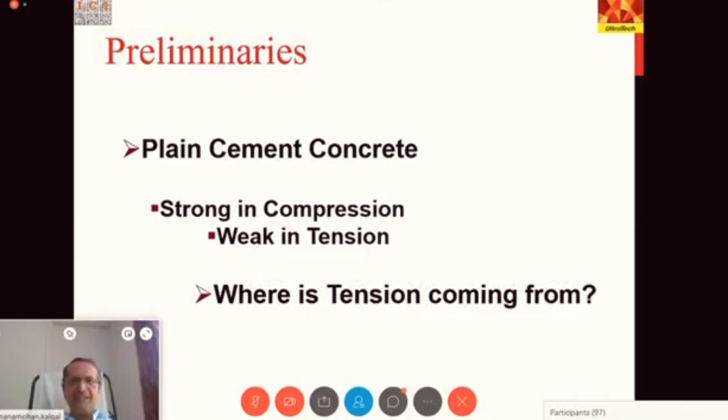But I'll start from the initial preliminaries. We know that plain cement concrete is very strong in compression but weak in tension. But why are we talking about this tension? Where is this tension coming from?

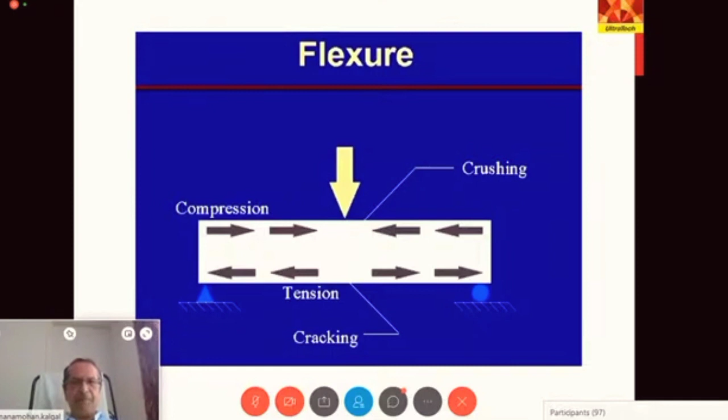The place where it becomes zero is called the neutral surface, which your teachers have also taught you. If you look at this in two dimensions, a member subjected to a vertical load at the center and supported at either end will experience tension at the bottom and compression at the top, as shown. This is how we represent a stress diagram - tension at the bottom and compression at the top.

So when we subject a plain cement concrete beam to a transverse load at the center like this, you will see that at the bottom, where there is tension, since concrete is weak in tension, it starts developing a small crack. This crack happens when the tensile capacity of the concrete is, let's say X, and the tension reaching that particular surface also reaches X - then a crack is initiated.

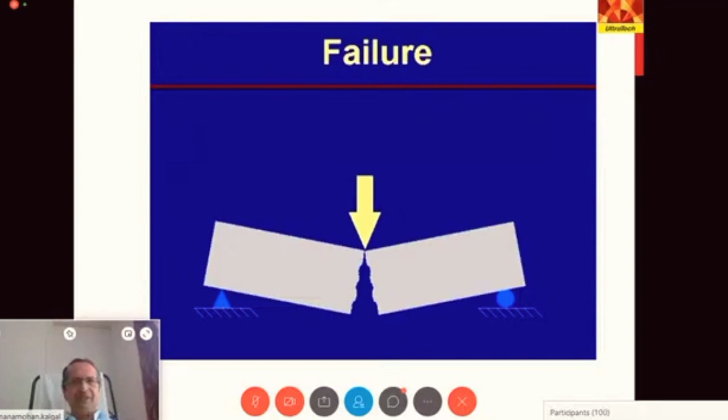So the minute that crack is initiated, because concrete is weak in tension, the beam will break into two. This kind of experiment you would have done in the laboratory with either single point loading or two point loading.

Now, people thought that we will use steel to take care of this tension because concrete is not capable of taking it. Why was steel better? Because it is very strong and ductile in tension, it has a thermal coefficient of expansion similar to that of concrete, it can be easily bent and placed whichever way you want, and is readily available and relatively inexpensive.

Also, it bonds very well with concrete, and now with ribbed reinforcement, the bond is excellent with concrete. What happens is concrete reaches its tensile capacity and is about to crack, a small crack develops, and only then is the tension transferred to steel. The steel says, okay, I will take care of tension, and from there on, the micro crack which has developed will not further grow, but the steel will start taking the tension.

So this is the role of the reinforcement, and hence such a concrete is called reinforced concrete.

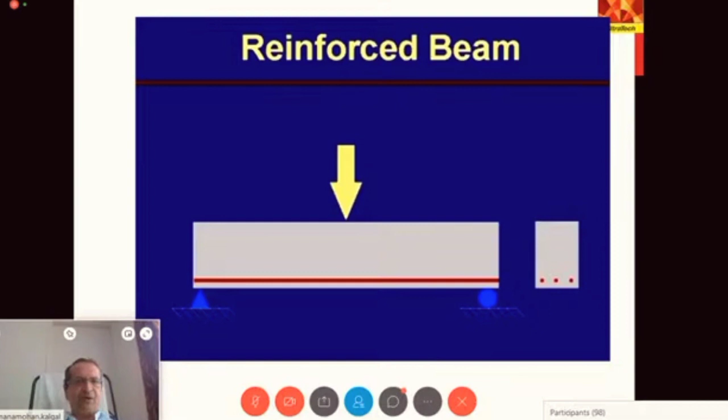So you can see here a concrete beam which has steel at the bottom, and in the cross section you can see three rods placed at the bottom. When we subject this to a vertical load, the tension is now taken by the steel. The area of the steel and the tensile stress carrying capacity of the steel will determine how much tensile force it can take.

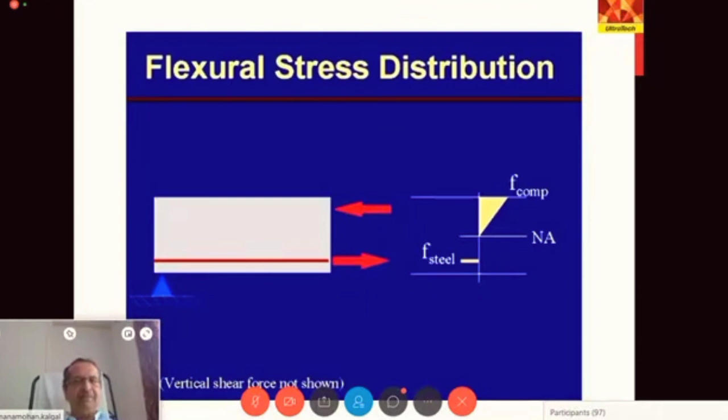The compressive force is the maximum compressive stress that it can take, and the area of the compressive stress diagram will give you the total compression it can take. There are different ways of looking at the stress distribution in concrete, whether it is triangular, rectangular, parabolic, and so on. I'm not getting into this, all of this you have studied.

So in a reinforced concrete, when you start loading it centrally, first one crack will open, then it will transfer the stress to the steel. But there are other areas where the concrete has not yet cracked. They also start developing small cracks and transferring the tensile stresses to the steel.

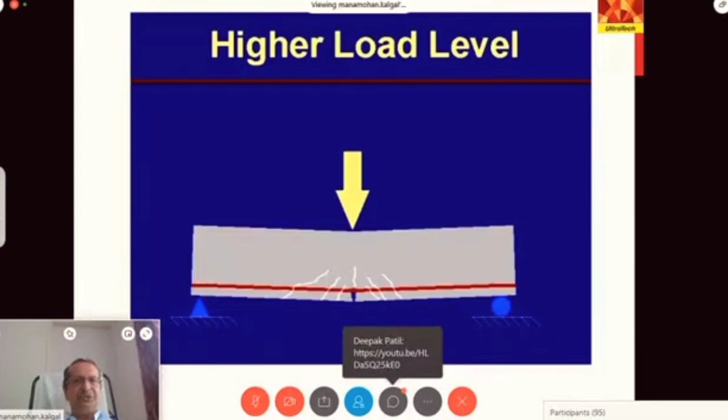Now, as we increase the load, the crack in the center starts becoming wider and wider. Once the steel reaches its capacity, it starts yielding and the beam tends to bend and fail, or it can't take any further load. So this is the typical behavior of reinforced concrete.

Now, when we talk of pre-stressing, what is pre-stressing after all? It means we are stressing it before it is brought into use. This is a method by which we create internal stresses which are permanent in a structural element. We do this because we want these stresses to counteract the stress which is going to come when the element is in use.

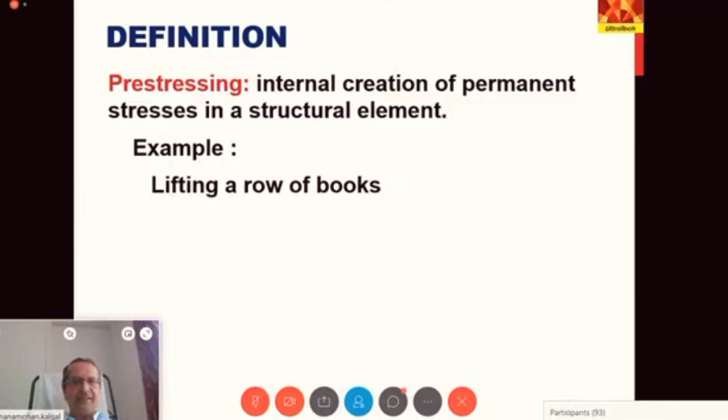Teachers teaching prestressed concrete normally give the example of lifting a row of books. Suppose you have a set of books on your rack and you want to lift it. If you put hands on both sides and try to lift, it will not come up. Only when you apply pressure towards the center will this particular section become strong enough to be lifted as a whole. So this lifting of the books is a function of how much pressure you put inside.

Also, if you apply sufficient pressure, you can not only lift the set of books, you can even keep some books on top and lift it along with it, which is like the tension in the concrete.

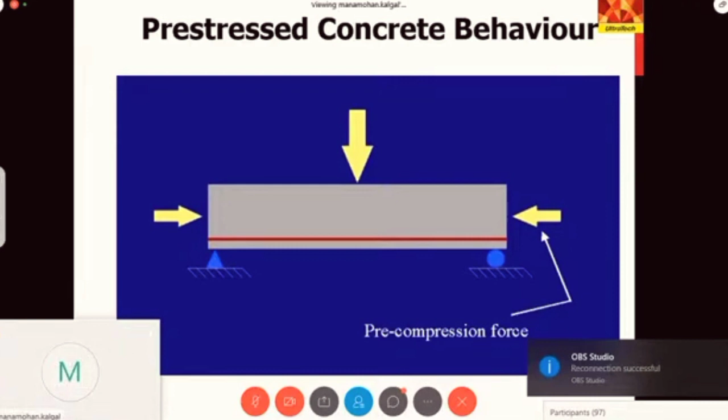Now again, we'll come back to this picture. The pre-compression forces are shown by two horizontal arrows there. If I apply a vertical load, it will induce tension, but it has to overcome the compressive stresses which are already built in there. So this compressive stress will have to be overcome by the tensile stresses caused due to bending. Then it becomes zero, then it can become tension, and only then it will crack.

But look at what happens on the compression side. Already there was a pre-compression.

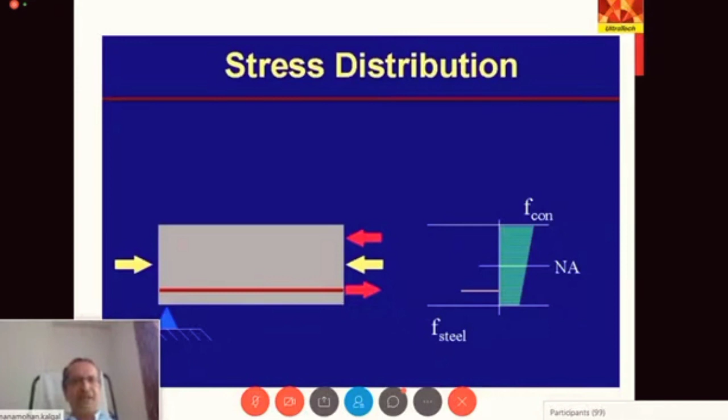Due to bending, there is a compression, so that compression plus this compression added will become a larger compression at the top. And if the compression is sufficient enough and more than the tension likely to come due to bending, you can keep the whole section in compression. I'm not going to explain further on this because that is not the aim of this particular lecture.

I just wanted you to know conceptually what this particular pre-stressing and pre-stress concrete is all about. My fundamental focus will be more on precasting and its application along with pre-stressing in the building sector. There is another concept which I just want to draw your attention to.

In the tube, if I put this steel wire, and before or after the concrete becomes hard, if I can pull this particular wire and lock it from not coming back to its original length, suppose I pull this wire within its elastic limit. If I pull a rubber band and leave it, it goes back to its original shape, right? Similarly, if I have a high tensile steel wire, if I pull it within the elastic limit and release it, it goes back to its original length.

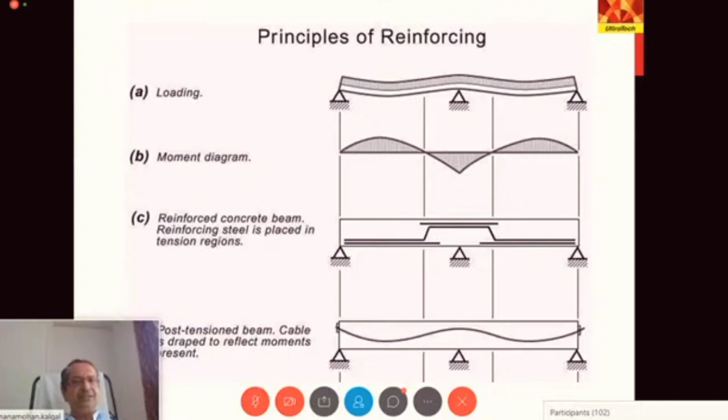Now, if I come to a post-tension beam or pre-stressed beam, what do I do? I pass a cable in such a way that the cable is present wherever there is likelihood of tension. Now, what will this cable do? This cable will actually create compression. That means if I have a beam which is likely to get tension at the bottom at the midspan, and tension at the top at the center of the support, I put a cable and create compression there. So when the actual load comes and tries to create tension, it has to first overcome the compression. So it is much superior in its behavior.

So the advantages of pre-stress concrete are that the full cross section is used. The section is under compression most of the time, so it is generally crack free. It is more efficient, and because we are using the full section, smaller sizes can be used for the same stresses, so it will have lesser self weight.

It becomes very important in very large spans, like let's say a bridge girder. A bridge girder has such a huge span that the depth of the beam becomes too much if I were to use an RCC section. How do I increase the capacity of the RCC beam? I have to either increase the steel or increase the depth, right?

We would like to avoid such a situation by going in for prestressed concrete, which has smaller sizes, lesser self-weight, and much better capability to handle deflection issues. It can also take overloads, because in a prestressed concrete member designed for a bending moment of X ton meter, if that is exceeded, the stresses on the flexural side can become zero or negative, and a small crack can open. But if that occasional overload is removed, the crack will immediately close because the compression will take over. These are advantages of prestressed concrete.

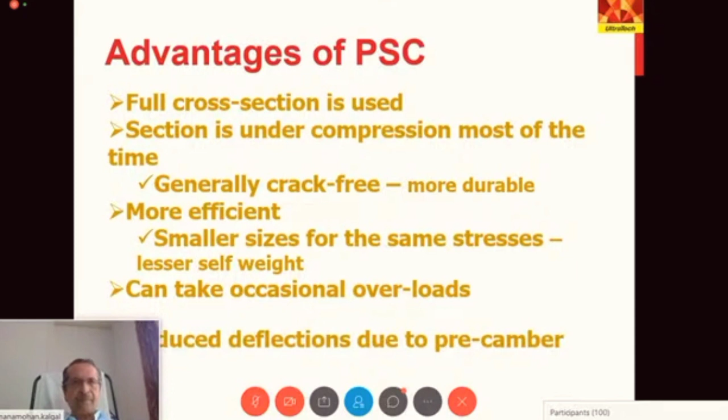I also mentioned reduced deflection, because you can create a slight upward deflection by prestressing. What is used in prestressed concrete? The same concrete is used, but remember that on the top side there was compression plus compression, so a higher compression. So we tend to use higher grades of concrete like M35, M40, M45, and so on, required to tolerate the high stresses and also to minimize a phenomenon called creep.

What is creep? Creep is deformation under sustained load. We are keeping compression on throughout its life, so it is possible that the member may shorten due to this creep. Creep is also possible in steel - the steel wire is kept in tension for a long time.

Take the example of a rubber band. If I pull it and leave it, it comes back to its original shape. Now if I keep the rubber band pulled - say I put it around a roll of drawing sheet and leave it in my attic for 6 months - after 6 months, if I remove it and check, it will not come back to its original shape. Why? It has relaxed. It has got sick of wanting to come back to its original form. This is called creep, or relaxation.

In steel also, it is likely to relax because the stress will be on throughout the life of the structure, and steel has a tendency to relax if it has lesser strength. So we use very high tensile steel here for two reasons: to avoid much relaxation due to creep, and to tolerate very high stresses. The steel has to be stressed within its elastic limit so it has an urge to come back. If I use a very strong material, I can stretch it to a larger force without exceeding the elastic limit.

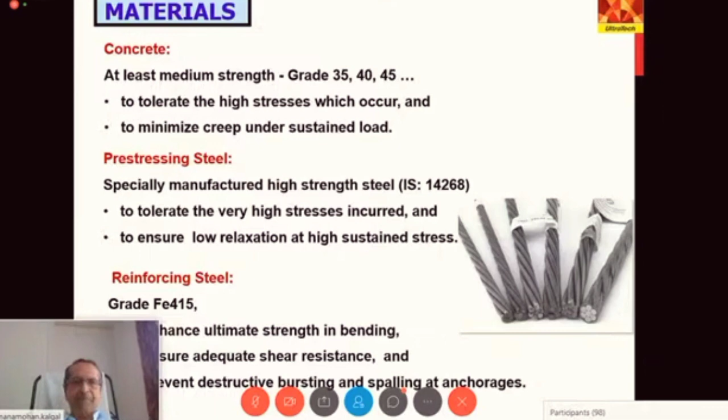Now I come to the main thing called precast concrete. Just like prestressed, here is precast - pre means earlier, cast means it is cast earlier. So a concrete which is cast earlier, a product made out of concrete cast earlier in a reusable mold or formwork, then cured in a controlled environment, transported to the construction site and kept in position, is called a precast member.

In contrast, a standard concrete member that we are accustomed to in our buildings is actually poured at site in specific molds and cured at site. Here, we cast the concrete elsewhere, not in the place where it is supposed to be, and do it in a factory kind of atmosphere. So it is either reinforced concrete or prestressed concrete - precast simply means it is cast earlier. Whether it's prestressed or reinforced depends on what kind of forces are in it.

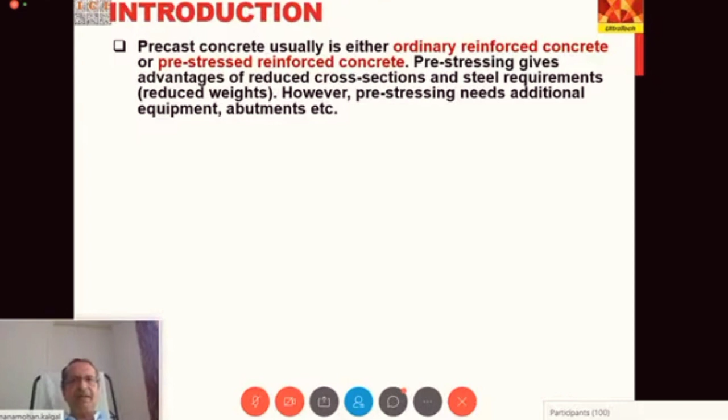This precast concrete is generally made in a factory off-site, or it can also be cast on-site somewhere down below on the ground if you have sufficient space, avoiding transporting products from a long distance. A better quality is obtained, and workers and supervisors are well trained and experienced, so you don't have different laborers working at different points of time. Also important - since the members are already cast and ready, you don't have to worry about the weather. In normal construction, if it rains, the construction will stop.

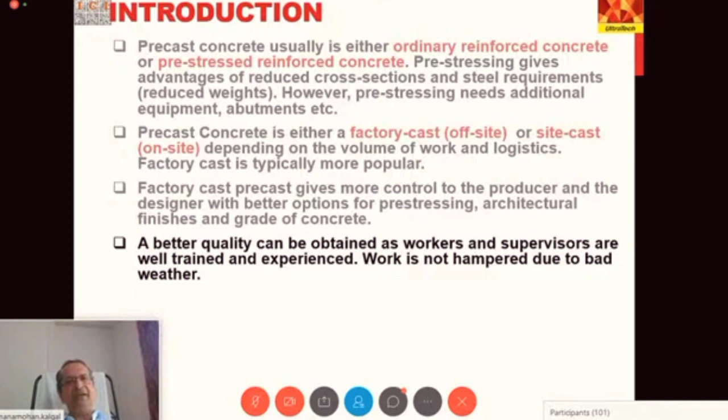Construction can go on even in rain because the concrete is already hardened and strong enough to take the loads. Site precast may or may not be adopted, but it's common when the project volume is very large and setting up a plant at site is economical. Otherwise, the cost of setting up the plant at site may be prohibitive.

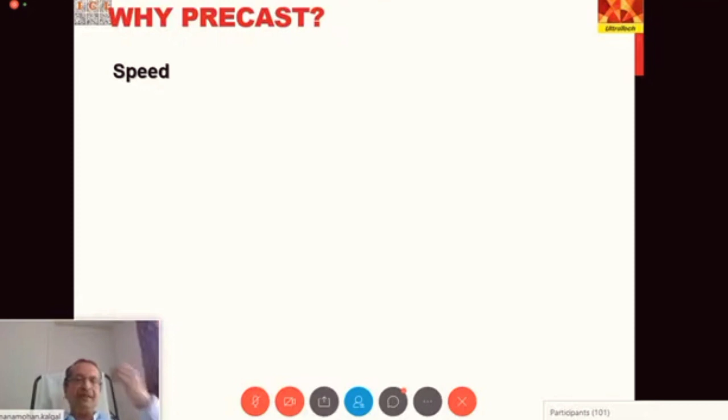What are the other reasons to go for precast? The first and fundamental reason is to achieve speed. While structural precast elements are being cast at the factory, other works like excavation and foundation can be carried out. Once the foundation is ready, the precast materials can simply be lifted to the site and placed in position. So very quickly you can build the structure.

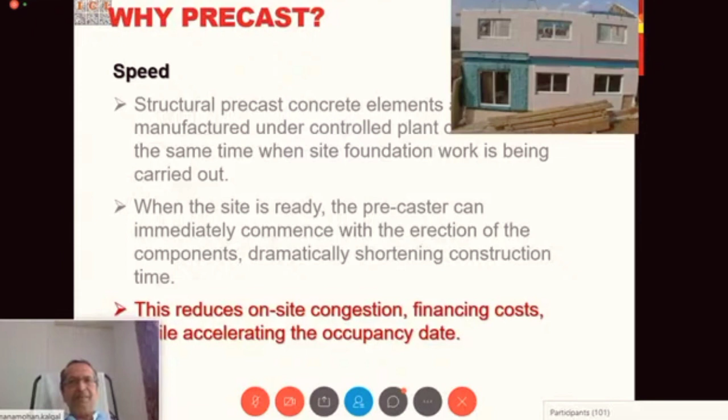This also reduces site congestion because you don't have to store all the aggregates, cement, sand and so on at the site—only the precast materials need to be brought and assembled. This increase in speed also helps with finance costs, since people might have taken loans and have EMIs to pay. If the building is ready fast, it's much better for financial issues too.

Quality and durability are automatically built in because precast is made under factory conditions. High strength concrete can be used, very accurate placement of steel can be ensured, and a very good finish can be achieved. So quality and durability will not be an issue in precast concrete—that's another reason why people go for it.

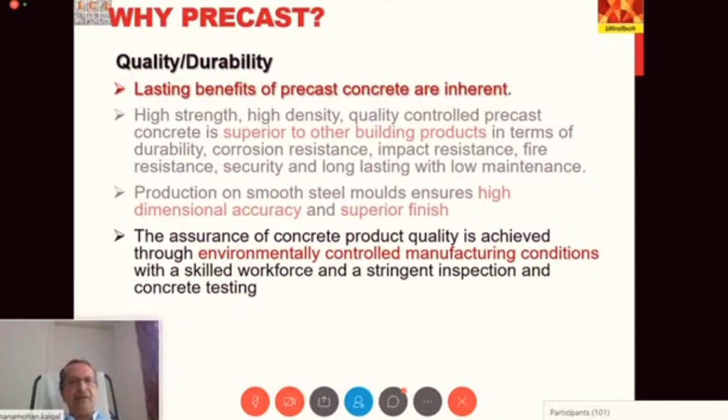The dimensional accuracy is so precise that it fits just like Lego pieces. Any finish that you want, extremely superior finishes can be given. Because it's done in an environmentally controlled manufacturing condition, the entire concrete is quality certified.

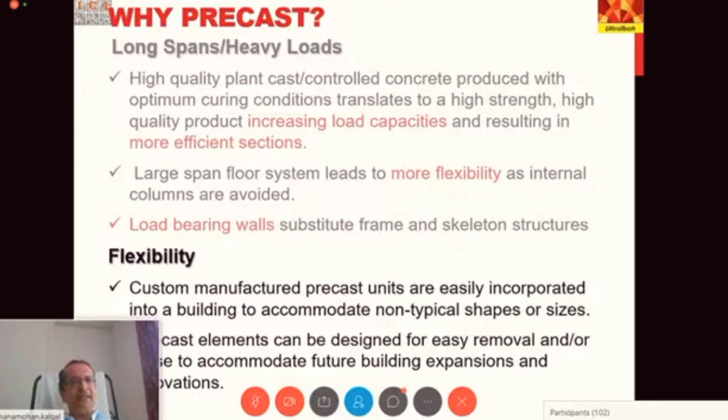We can also design and provide for very long spans and heavy loads. Large span systems can be built, load bearing walls can be prepared, and we can build in a lot of flexibility by custom manufacturing the precast units and incorporating them into the buildings. It's an all-weather construction method—low maintenance, environment friendly, and economical for all these reasons.

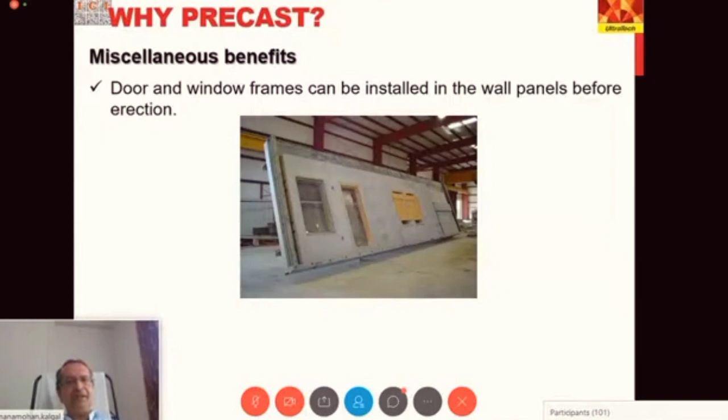Some other benefits: you can incorporate door and window frames, light fittings, electrical conduits, and pipe fittings into the walls and structural components before they come to the site. This saves time and avoids quality issues. The only requirement is that you must plan everything properly and give those details to the precast manufacturer to incorporate doors, windows, and all other appurtenances.

Even surface treatment requirements can be incorporated using appropriate shuttering and form liners. Precast walls are generally thin, which gives larger carpet area—meaning a builder selling the property gets much larger carpet area to sell, making it economically viable. Better health and safety standards can also be incorporated.

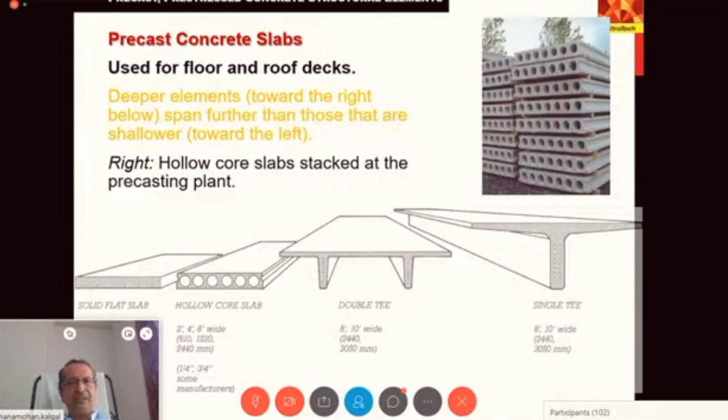Now you can see here hollow core slabs stacked in a factory. They can have different depths and different hole sizes, depending on what span and what load they are designed for.

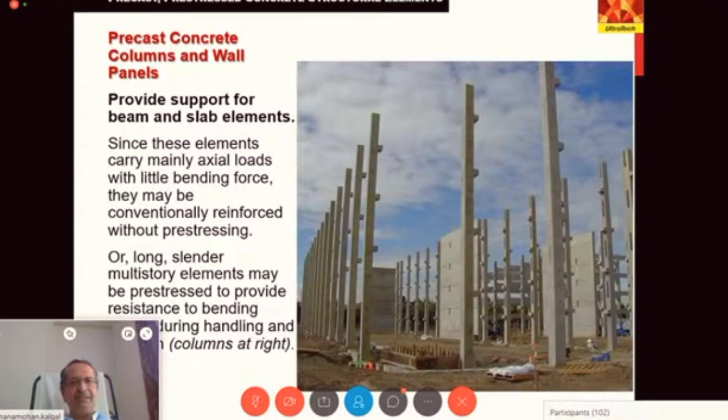So here you can see a set of wall elements and column elements standing at the side. You can see brackets or corbels in the column on which the beams or slabs can come and sit. Between the columns, into a sleeve, the vertical elements or slab elements will go, and this will act as wall panels. Here are a few wall panels cast and ready for lifting and placing. These walls can be hollow, solid, or even have a sandwich of some soft or thermal material built into them.

Wall materials or wall panels can even have ribs to get higher stiffness and higher strength, and they can be made in different shapes to accommodate doors, windows, and whatever architectural features are needed.

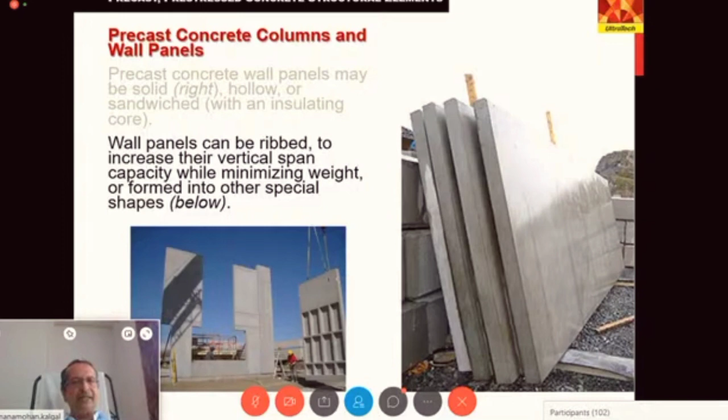Now, how to design this? Most of you are probably not into design in a very big way, but depending on the type of construction you want to do, you can have different approaches to design. The assembly will depend on what kind of concrete elements you want to assemble and how much of it is precast versus cast in situ. What is important is that the same concept applies: the slab transfers load to the beam, which transfers load to the columns, which transfers load to the foundation. The same principles apply.

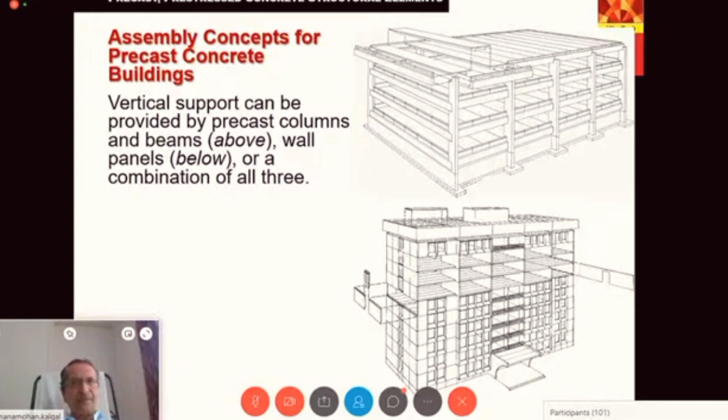It's also possible to eliminate the beams or eliminate the columns, and instead have a total wall system, where the wall itself takes all the loads from the slabs and transfers them to the foundation. So the choice of roof and floor elements depends on the span requirements, and precast elements are used with other vertical load bearing elements. It may be a site cast system.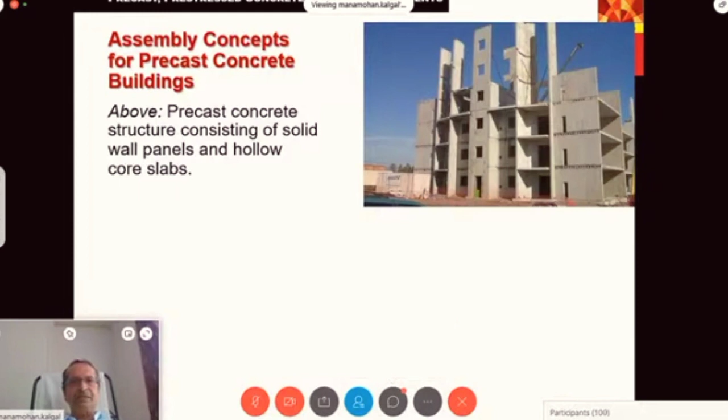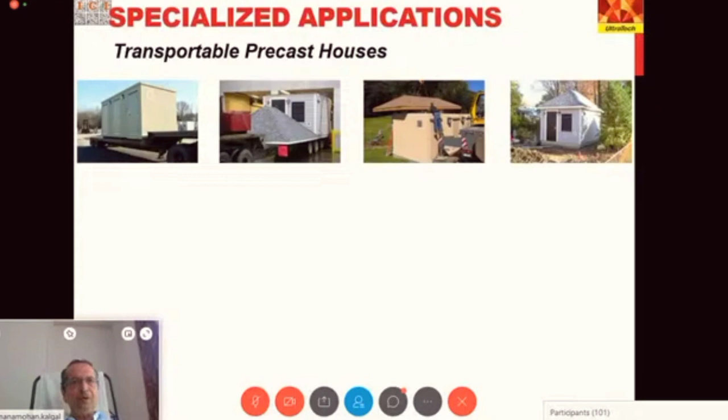You can even cast the whole building in one shot, put it on a truck, and take it there. In fact, now at Ultratech, we are also trying to divide the house into two parts, cast them elsewhere, bring the two parts on a trailer, connect them, and the whole house is ready. So this kind of transportable precast house is also being thought of, either as full elements or as a full or partial house.

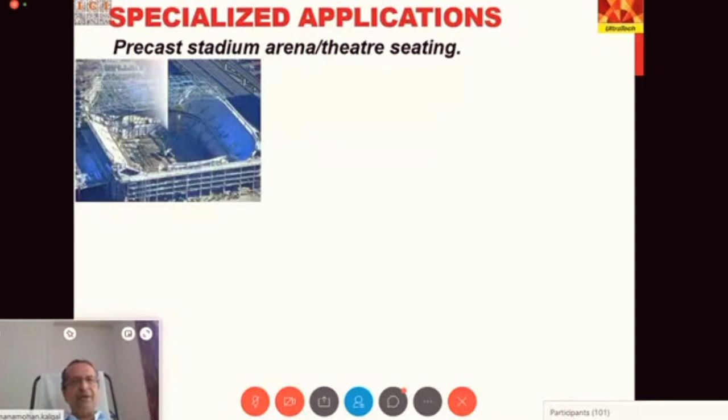In Bangalore, a company called Moore Living built ground plus 3 houses by this method, assembling two parts or a full part of a house and simply lifting it into place. That was a wonderful experience to see. It can also be applied in very large stadiums, arenas, theater seatings and so on, where large spans are needed and you want to construct very fast. Precast is one of the ideal things to do.

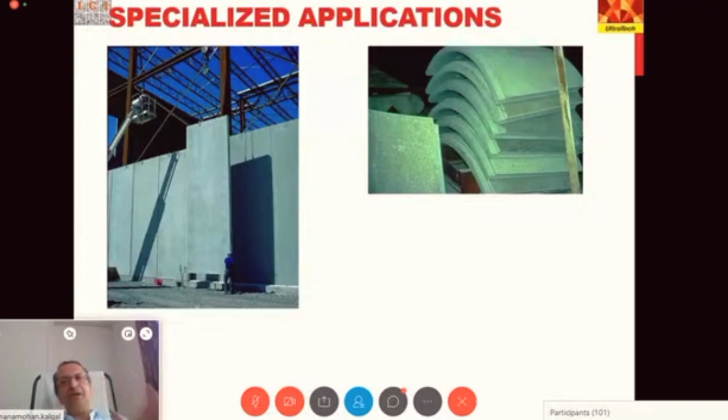There are other specialized applications like sound barrier walls, custom precast rings for chimneys, storage and holding tanks, interior firewalls, and tunnel linings. Most of you are aware of the metro coming up. In the metro, which goes underground, a tunnel is bored by a tunnel boring machine. After the tunnel is bored, at the openings or inside the tunnel, a liner is placed, typically a precast section, as you can see on the top right hand side. As the tunnel boring machine moves, it keeps placing these rings or segments to form a ring into which the trains will move.

Pipe racks are also possible with precast. These are ready-made tunnels or ready-made boxes which can be used as underpasses, ducts, crossovers, and so on. Culverts are another very good example for precast.

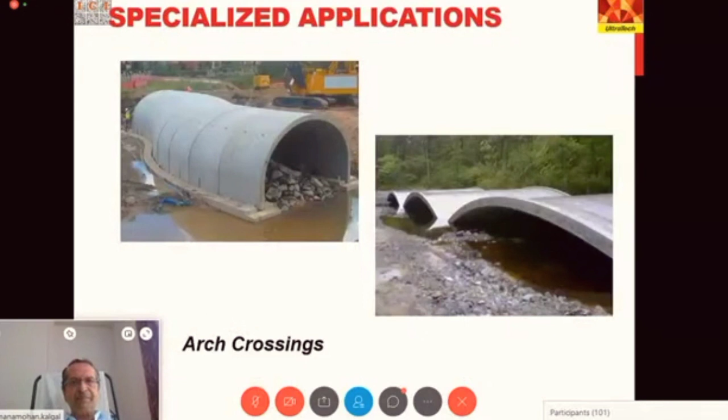This is an arch crossing in precast. Precast pavements - now even roads are being cast elsewhere, then brought and assembled at site. One night you close the traffic, put all the precast members there, stitch them together by pre-stressing, and next day morning you have the road ready. This is an excellent application of precast in the road sector, though not in the building sector.

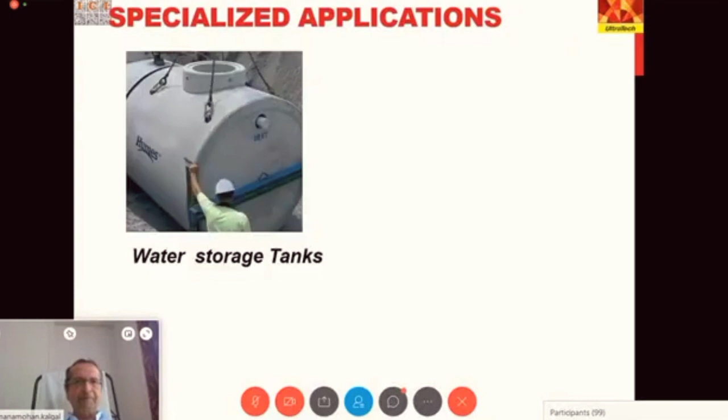These are some specialized applications like curb barriers, wheel stops, etc. And some more: manholes, cattle feed troughs, water tanks, and so on.

Let me go quickly, we have another 10 minutes only. Probably I can go up to 15 minutes. Deepak? Yes sir. Yes sir. Yes sir, you can, sir.

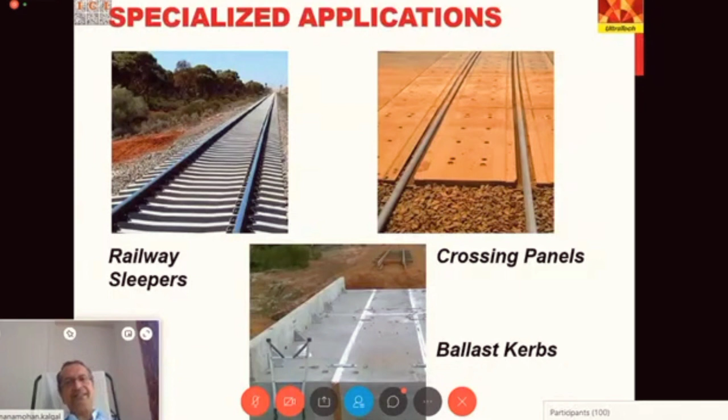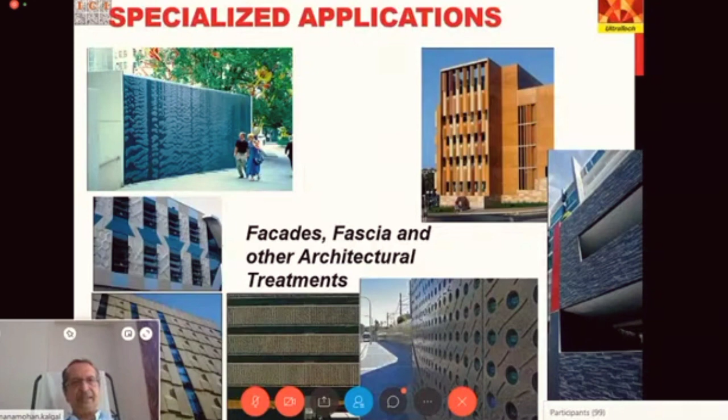You can see how beautiful this compound wall looks, and the entire thing is a precast member. Just cast it, bring it, slide it into the columns, and you have a beautiful compound wall ready. When you have kilometers and kilometers of compound wall for, say, a large industrial area, precast is an ideal application. You may be thinking precast will not be beautiful, but you can see here all of these are precast members which are so beautiful - by adjusting the form liners, you can make the concrete look very beautiful.

Now there are a number of slides here on analysis and design aspects. I think someone is unmuted. Yes sir, yes sir. Please, somebody is unmuted, please mute the audio.

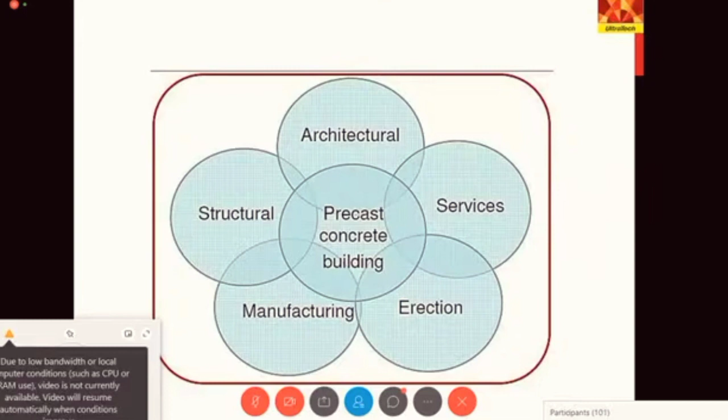Nothing is possible in the precast because everything is pre-planned, pre-calculated and pre-inserted. The whole idea is to bring efficiency and speed, hence nothing hodgepodge can be done. After the entire thing is done, you can't change the plan. The plan has to be frozen right at the beginning. The minute the first precast panel comes, nothing can be changed after that.

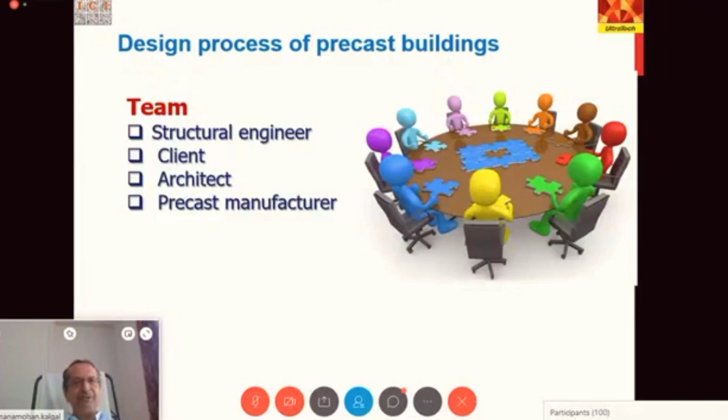So the team has to work together right from the initial structural engineer. Even the client has to be on board because the client should approve of the plans being thought of. Tomorrow he cannot come and say, I want this changed, that changed. So everybody has to be there. The typical process is: the design brief is written out, the architect's sketch plan is done, conceptual design is done, and then the final design is done.

After the final design is done, shop drawings are given to the factory, giving all dimensions and details perfectly so that the precaster can start precasting. Then there should be erection drawings given to the erection specialist as to which element has to be erected first. All these elements have to be numbered and so on.

I will not go into this design approach in detail. What is important is that the sections will have to be minimized, and hence it is preferable to have a modular plan so that you use the same molds repeatedly, the same kind of sections repeatedly.

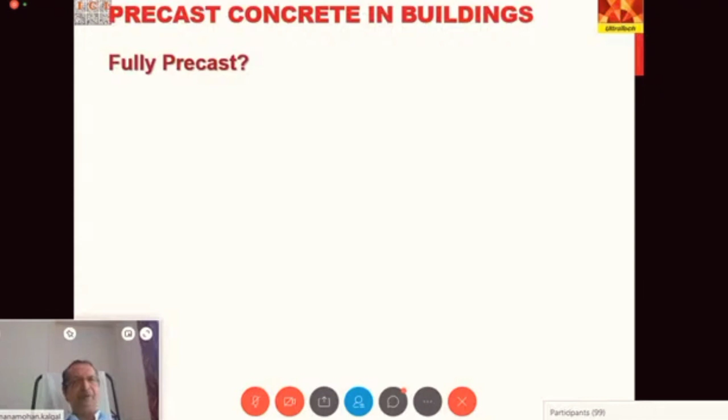Another important question is, should you have a fully precast section, a fully cast-in-situ section, or a combination? A combination is definitely possible, but with precast you should try to maximize precasting so that the elements of speed, economy and quality are all built in.

So that's about it. Architecturally also, you can make it very, very beautiful. The layouts have to be a little simpler, and floor to floor heights have to be such that the wall panels can be transported.

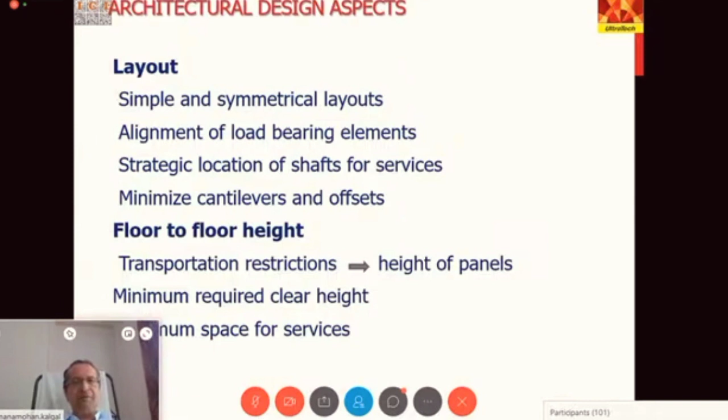There are issues in transportation in India - a lot of cables on the road, tree trunks, and many other obstructions to transporting the material. So you can't have tall members being transported on trucks. We will come to that a little later.

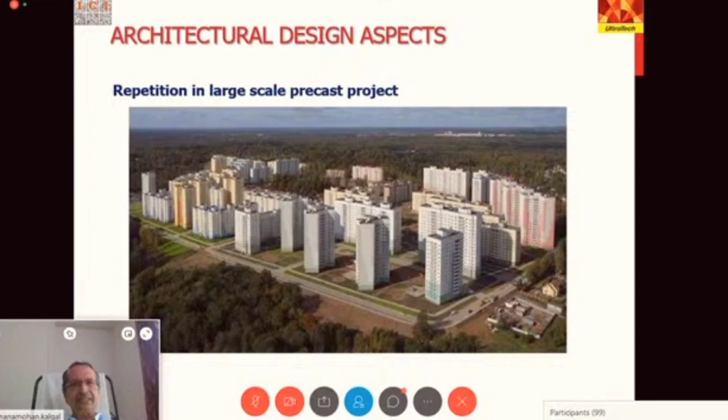So you can see here some large buildings which are built with the advantage of repetition. The repetition in a large scale project makes precast the ideal choice for construction.

So the details are important, detailing is important, tolerances between the elements are very, very important. If the sizes are not correct, it will just not fit there. This is something one has to look at, so I'll skip all of this.

I'll quickly take you in another 5 minutes or so through the manufacture, transportation, and erection. You can see this is a typical...

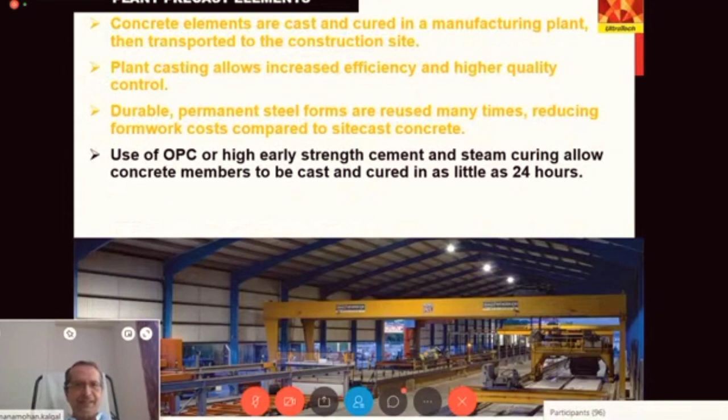Sorry for the interruption, sir. You can go ahead. There is no problem, we have kept only one webinar, no next person will come, so let the students listen to you. If they are interested, they will ask questions at the end, so I'm keeping some 10 minutes for that. I deliberately avoided design issues because they are not mature enough yet. Many faculty members have also joined from Kerala, Chennai, and elsewhere at the national level, so many people have joined. You can take another 10-15 minutes extra, nothing wrong in that. Okay, I'll go back five slides and quickly deal with the design issues a little so they will also be satisfied. Just one minute.

So when it comes to the design, what is important is the load flow. How the vertical load flows is something one has to visualize properly. You have to achieve proper transfer of vertical loads. You must visualize how the load will go from top till the foundation.

As far as lateral load path is concerned, most of these are designed as shear walls. Shear walls will be required in both directions to withstand lateral loads due to wind or earthquake. The floor is taken as a diaphragm which transfers horizontal loads to the vertical load carrying members, which are the shear walls made out of the precast wall elements.

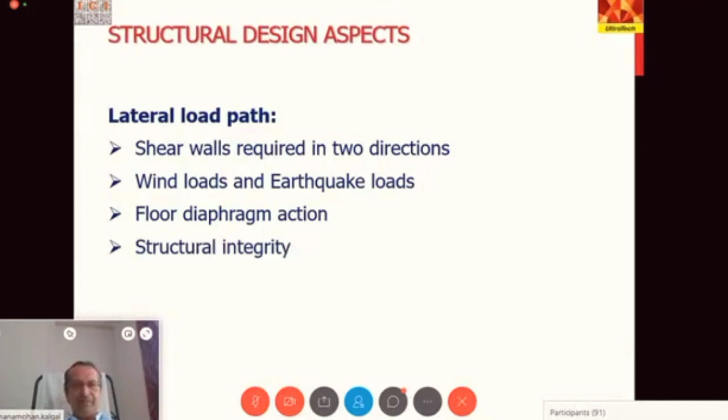Structural integrity becomes very important. The shear wall design, arriving at bending moments and structural aspects, will depend on how the junctions are - whether they are monolithic, whether they have zero moment capacity, and so on. These are things which can be modeled and analyzed for the building as a whole, and also interstory issues in terms of moments, drift, and movement.

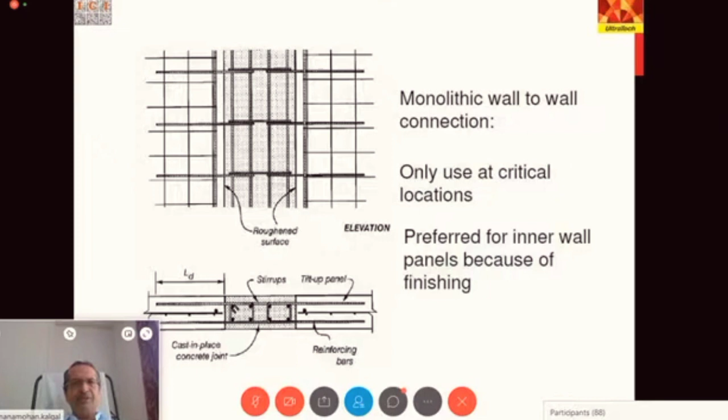So monolithic wall-to-wall connections are possible, and these are to be done at critical locations. For inner panels also, sometimes this monolithic wall-to-wall connection is made.

As far as loads are concerned, the same loads apply - dead loads, live loads, wind loads, earthquake loads, erection loads. Erection loads are slightly different and a little involved. People should take care that all load conditions and construction stage analysis are done, because the whole structure is not integrated as you build. There might be bending moments or loads due to erection with no resistance built in, so it's very important to do construction stage analysis.

So when I am at plinth stage, what happens? When at lintel stage, what happens? When at roof stage, what happens? When going to the next floor, how the panels are to be supported or temporarily supported until the load is handled - all of this has to be considered by the design engineer as well as the erection engineer.

Accidental loads might have to be designed for. Secondary effects due to contraction, expansion, differential settlements, eccentric connections - all of these which exist in normal buildings also will have to be looked at here.

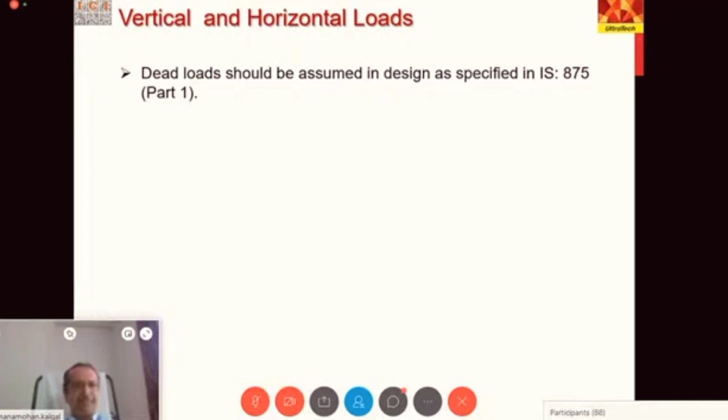Dead load should be assumed in design as per IS 875. Load from lightweight partitions are treated as line loads. Imposed loads for different kinds of occupancy are taken and put into that design aspect. Snow loads, if required, can be considered. Wind loads as per IS 875. Earthquake loads as per IS 1893, and so on.

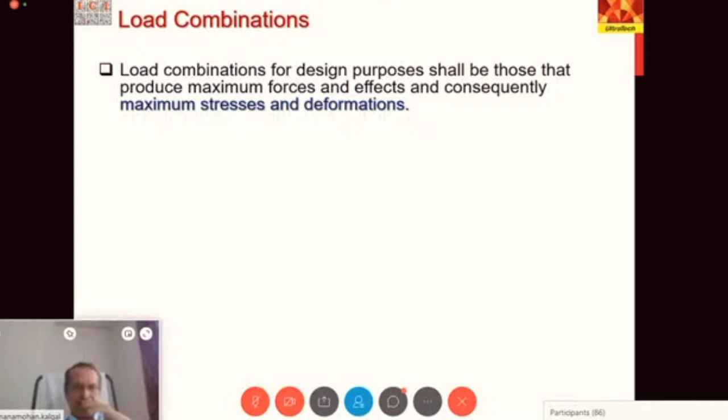Load combinations also, just like we do for other buildings, have to be considered here to see which combination gives you maximum stresses and deformation. It could be dead load plus imposed load, dead load plus imposed load plus wind load, or earthquake load, dead load plus wind or earthquake load, and so on. Dead load plus erection load will be one new case which will have to be built in. Wind load and earthquake load codes permit you not to act simultaneously, so you can take them independently and see which one causes higher stresses.

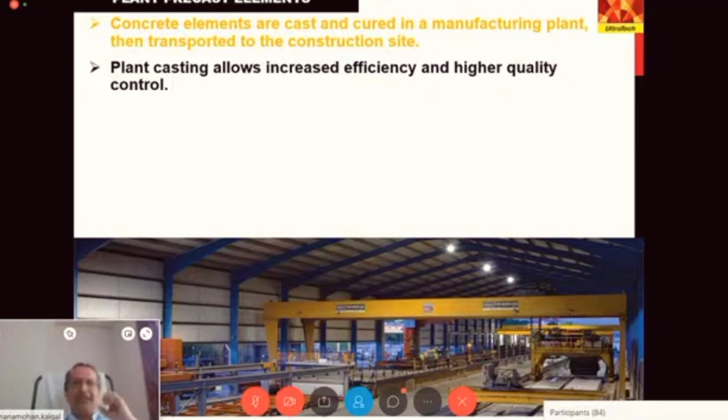The plant should also have facility for the concrete mixing batching plant and transporting the concrete from where it is made to where it is used. Precast concrete machinery basically includes concrete feeding machinery with hoppers, machinery for production of concrete products including vibration handling, and curing lines, because where you cast you may not cure, you may take it elsewhere so that place can be used for casting further elements. Palletizers are used once you make a number of pieces, you may stack them, palletize them, and keep them ready for transportation.

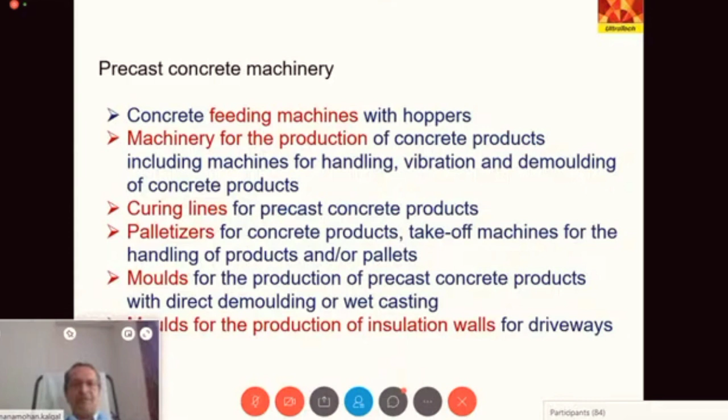Molds are most important because these have to be very sturdy and repeatably used. You can't stop a factory midway, so you should be able to use a mold for 1,000 or 2,000 times without stopping the factory, with minimum maintenance. There are molds for production of insulation walls, driveways, and such other things.

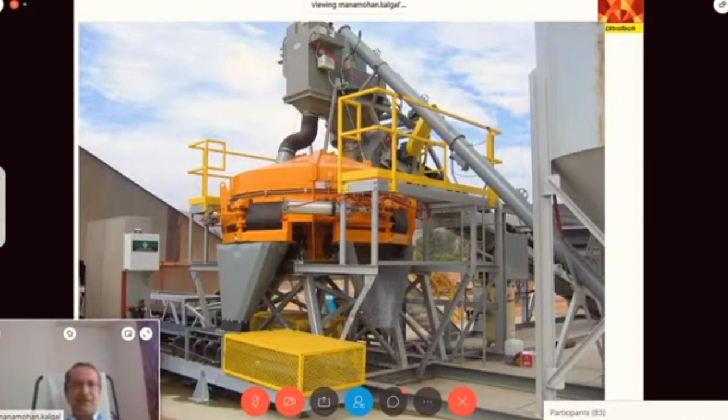This is a typical batching plant. You can see the concrete mixer drum, and then there is a hopper. In this photograph, concrete is being poured onto a belt, and the belt is carrying the concrete inside the factory. Concrete can also be brought using a transit mixer truck, which has come right inside the factory.

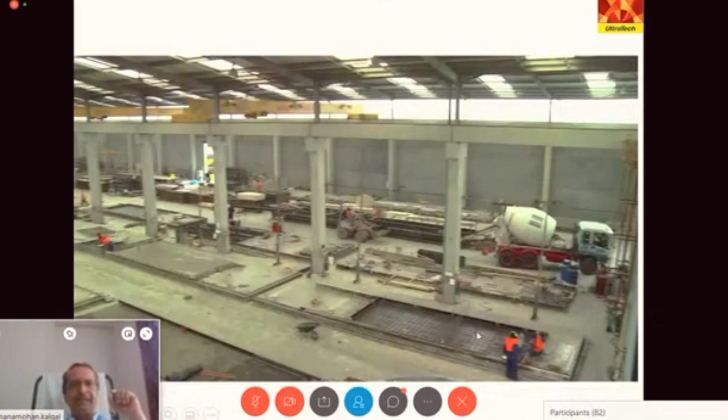You can see here that the reinforcement is being tied at one place, while concrete is being placed at some other place. All kinds of activities are happening inside the factory.

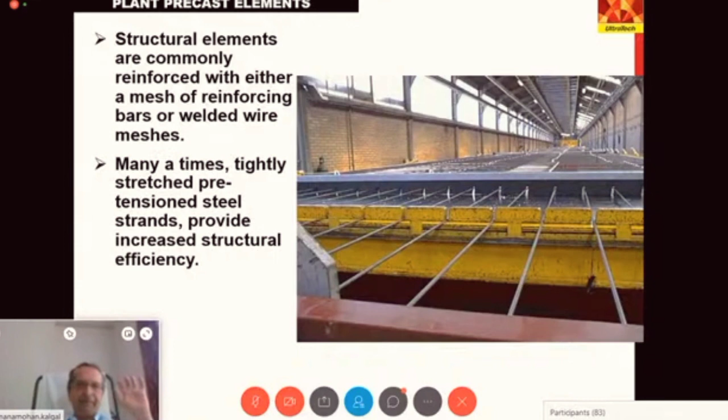Now you can see in this photograph the pre-stressed cables, which are now anchored. This is a pre-tension method, meaning you stress the cables and then pour or cast concrete over it by extrusion or normal casting. The structural elements use normal reinforcement, weld wire mesh, or pre-stressing cable - this is a typical arrangement. Conventional steel is added for resistance to thermal and other stresses, even in a pre-stressed slab.

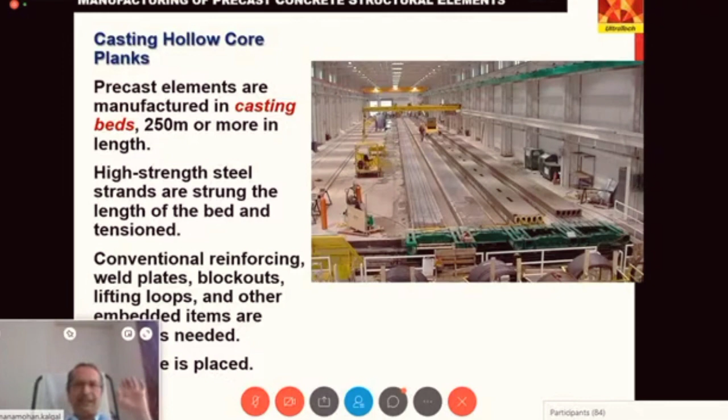Once the concrete hardens, you can see the extrusion machine on the third line moving forward, extruding the concrete, and on the right side a completely extruded panel. After the concrete achieves its required strength, a cutting machine cuts the panels to size, automatically cutting the wires and transferring the stress by pre-tension. This length can be 200 to 250 meters, with conventional reinforcing, weld plates, blockouts, and lifting loops all kept in place, then the concrete is placed by extrusion or normal placing.

So you can see here the hollow core planks. Hollow core planks may have cross sections varying from circular to oval to even rectangular, and the thickness of the slab depends on the span and the load, as I mentioned.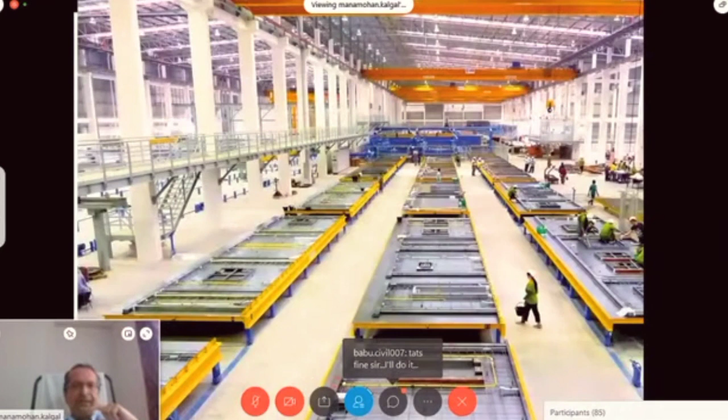Then the concrete pouring machine will come, which is on the other side, and then this whole thing can be cast wherever it is. There is also another system where this bench itself starts moving towards the concrete placement. So as the bench comes in front of the workers, they will assemble whatever they are assigned to work. When it comes in front of, let us say, group A, they will put all the reinforcement in place. When it comes to group B, they will put all the cover blocks in place. Or first they will put the cover blocks, then it will go to reinforcement, then it will go to conduit and so on. So the whole section itself will go from place to place. That is also possible. You can see here reinforcement assembled, the formwork is oiled, everything is ready for casting.

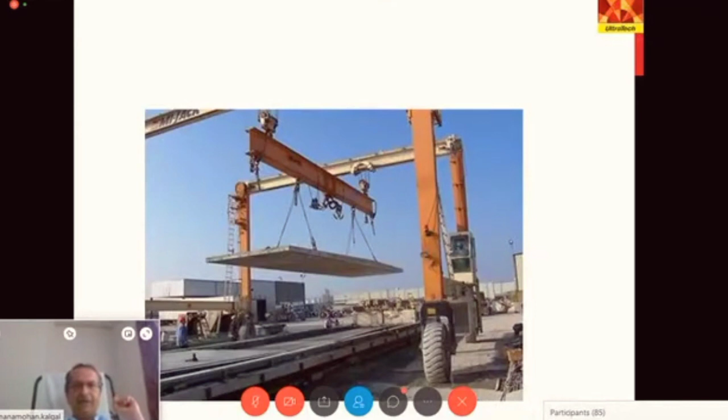So here you can see panels which are cast. You can see here panels which are now going to the yard for curing or for stacking. The same slab which I showed earlier, which had walls and other things built in.

The tables in which this is cast is called a tilting table. So what happens is you cast the slabs horizontally, but when you tilt the table, you can lift the slab, take it out of the mold and carry it like it is shown here. So it is cast horizontally, tilted into vertical, lifted and taken up. Because a slab which is lifted horizontally will experience very heavy bending moment. Now, if it is lifted vertically, you can realize that it is very stiff and hence there will be very high resistance to bending moments. I hope this is clear to you.

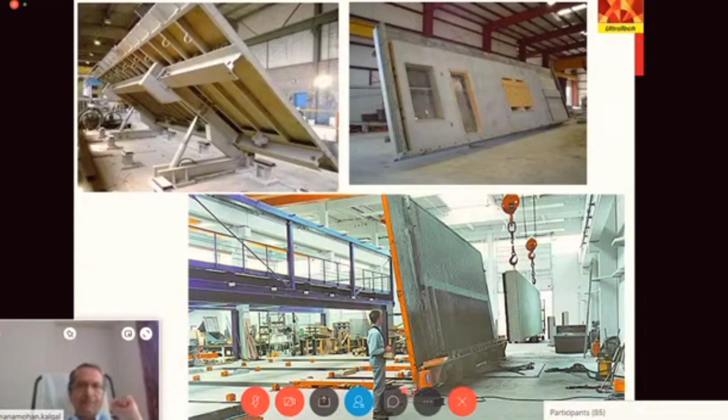So these are called vertical battery molds. So the wall panels can also be cured vertically. So it can be cast vertically, and you can see these pipes which are feeding steam into the molds, and they are steam cured in standing position. Then you just remove the mold sideways, and you will have the vertical element ready. This is used for casting the whole house, casting the whole unit or pods or walls, columns, and so on and so forth.

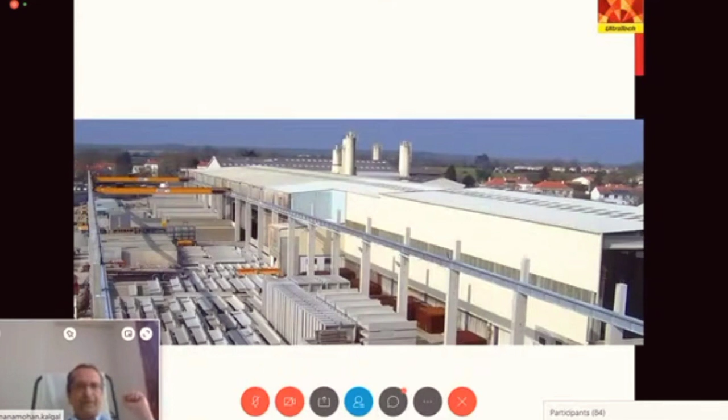So this is another large yard where you can see slabs, columns, are all stacked for transportation. You can see a vertical slab which is being transported, and the tying of this, connecting this so that it doesn't fall off. You can see that it is organized in the form of an A. If you keep it vertical, it will be much taller. So it is tilted towards each other, is more stable, and also is of lesser height.

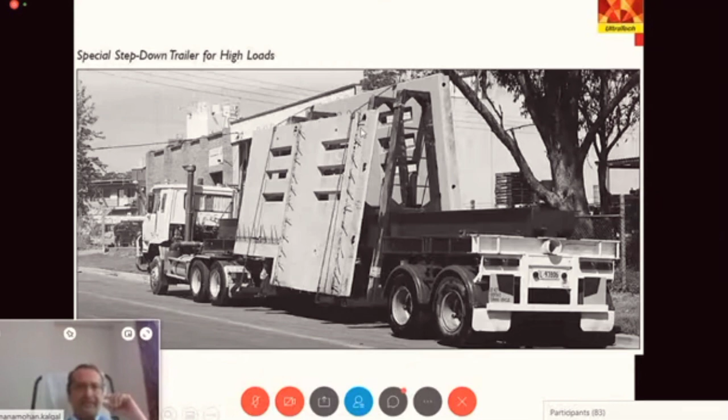And at the site, the hollow core panels are lifted and kept in place. The machinery which is on top is a very special machinery here. This holds this particular panel by vacuum. So there is no lifting hook. It just lifts it by vacuum and then places it there and releases the vacuum. So that is also possible.

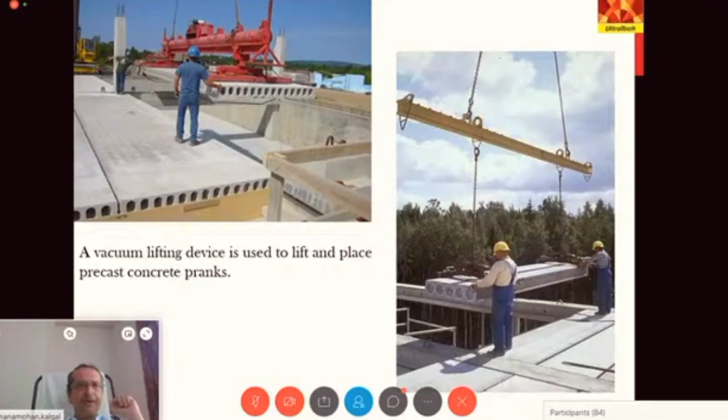Or you can have grips which will hold through the boom of a crane, and then they can be lifted and kept in place. So this is a picture showing the erection of a hollow core slab. The vertical wall panel being lifted, the points at which it should be lifted, is designed by the engineer, and it has to be lifted only in that place.

Otherwise, you may get into some very large undesirable deflections, bending moments, and the panel may break. How do you lift? Whether you lift it by tilting or by inclining horizontally is decided by the erection engineer and the design engineer in discussion.

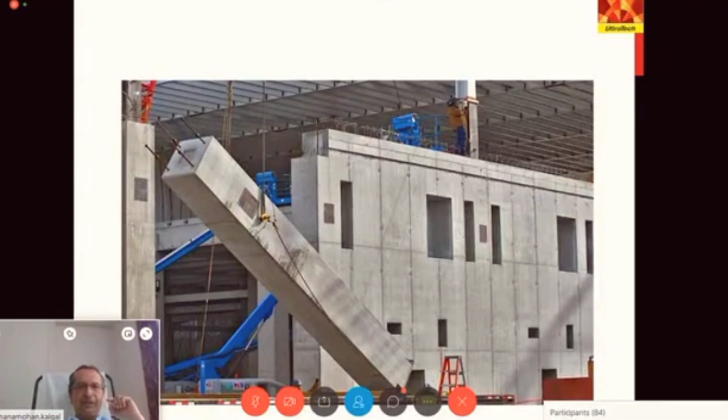The whole building now, the entire thing is precast. You can see columns are precast, slabs are precast, beams are precast. All of them are being erected. A huge number of erection equipment like cranes are a must.

So joining is the last thing I want to talk about. Joints are very important because the first doubt anybody will get is when a wind blows or an earthquake happens, will it simply fall apart like a pack of cards? No, because you will have to simulate what kind of loads will come at these joints, and you have to design the jointing elements very carefully.

If it is very difficult to design a mechanical jointing element, you can also go for casting joints. So joining of precast concrete elements is an important part - first the design of it, second how it is done at the site.

The second one is a beam to column connection. You can see here that the column with the corbel with all the required reinforcement is already precast. It has welded plates which are cast at certain places where it is going to enmesh with the beam coming from the horizontal direction.

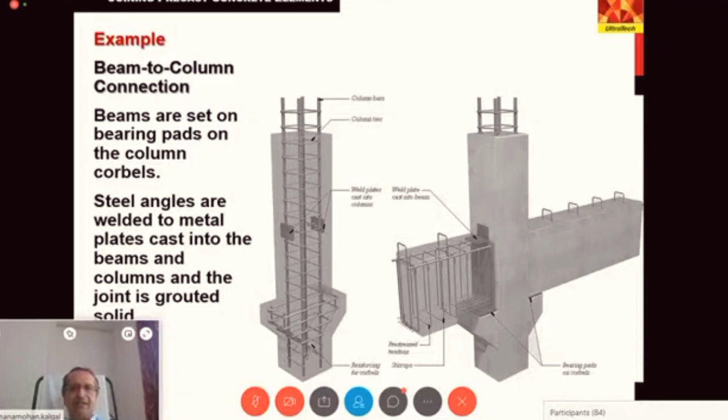The beam is also having the reinforcements which are built in with the welded plates cast into the beam. So these two are connected, bolted, welded, and if required, some local connection grouts are also placed.

So there are various ways in which you can connect the slab to beam, beam to column, and column to foundation. All the joints have multiple systems of connection, and one of the best ways to connect is to cast the junction monolithically with concrete, but of course it will involve a little bit of hassle at the site.

Here you can see there are two or three hollow core slabs placed side by side. Then the screed is placed on top. There is also a reinforcement on top called the surface reinforcement, and this whole thing will act as one particular slab.

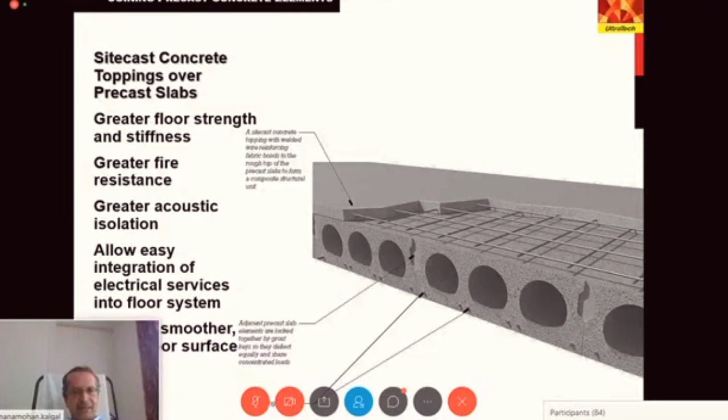So with this, thank you very much. If there are any questions, I would be happy to answer.